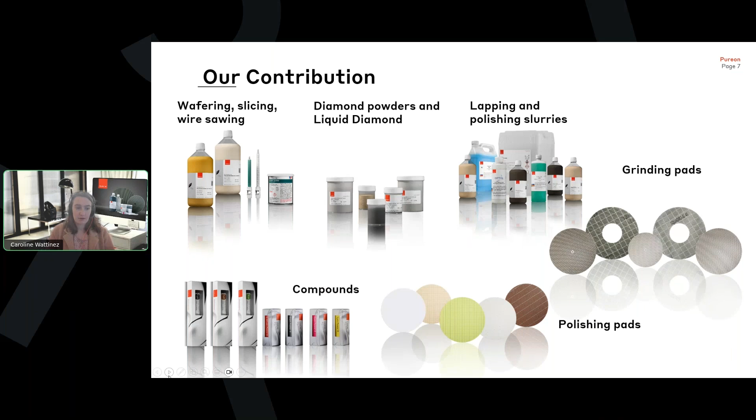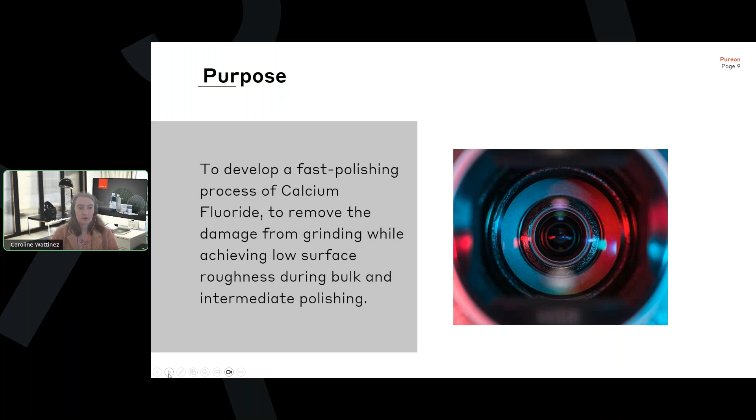Now I'll go into the purpose and background. So the purpose of the study was to develop a fast polishing process of calcium fluoride to remove the damage from grinding while achieving low surface roughness during bulk and intermediate polishing.

Why were we interested in calcium fluoride? We were interested in calcium fluoride because, compared to other optical materials, it has a broad transmission range for ultraviolet and infrared transmission, as well as low absorption, high damage threshold, thermal resistance, and low refraction index.

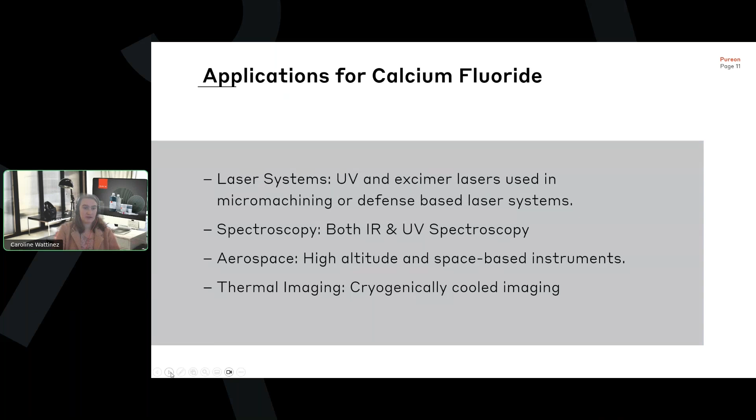Some interesting applications for calcium fluoride include laser systems, UV and excimer lasers used in micromachining or defense-based laser systems, spectroscopy for both IR and UV spectroscopy. In aerospace, it can be used in high altitude and space-based instruments, as well as thermal imaging.

The common manufacturing process for optics we have outlined here. You usually start off with generating your optic, and then you go into grinding in order to get the certain thickness that's needed for the application. And then after grinding, you do lapping or an intermediate polish to remove the damage from grinding. And then after the lapping or intermediate polish, you can go into final polish to remove the damage from the previous steps, as well as to get the surface roughness needed for the application.

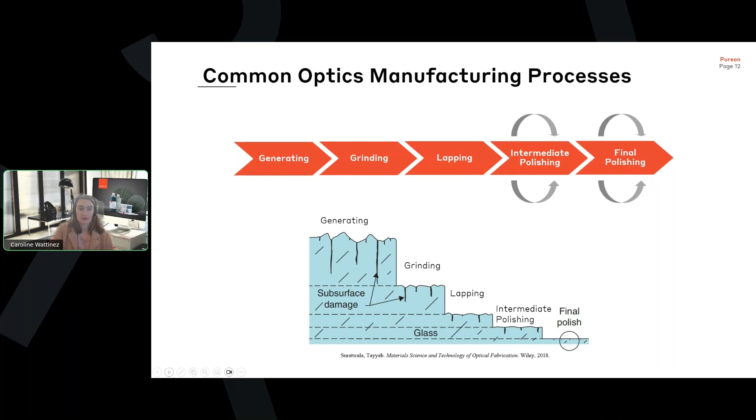But as you go from finer polish to finer polish, each step can get you a more precise surface, but a slower rate. So balancing material removal rate and surface roughness in each of these steps is important to have an optimized process.

So for calcium fluoride's physical properties, we're interested in processing this because it is different than the common optical materials that we're used to polishing. Because of that, the typical polishing solutions that would work for very common materials like fused silica and BK7 do not work for calcium fluoride. Calcium fluoride also has a crystalline structure. So we have some physical properties outlined here.

So as you can see with the Knoop hardness, it is a much less hard or softer material, with 158 Knoop hardness versus fused silica that is 570 and BK7 is 610. Another key difference is the crystalline structure, where calcium fluoride is crystalline versus fused silica and BK7 are not. As well, it has a much higher thermal expansion coefficient.

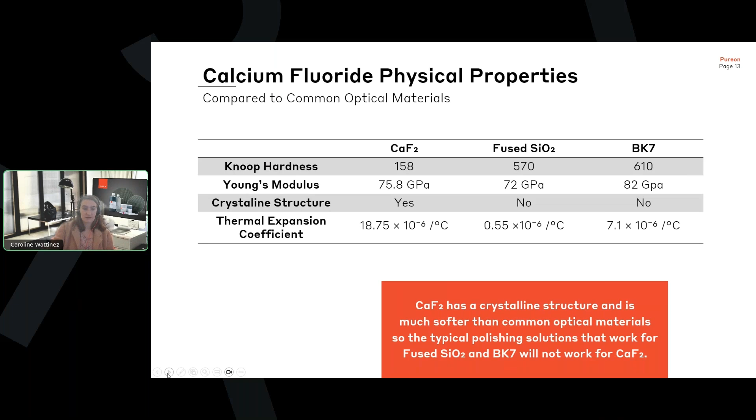The product that we have found that works well with polishing this different type of material is called ULTRA-SOL AlumaGem. The AlumaGem is a platform that utilizes both precisely graded diamonds and alumina abrasives dispersed and suspended in optimized carrier fluid for the bulk and final polishing steps, where you choose a different diamond size depending on the polishing step you're on, using a larger diamond for the first step after grinding for bulk removal, and then stepping down to smaller diamonds.

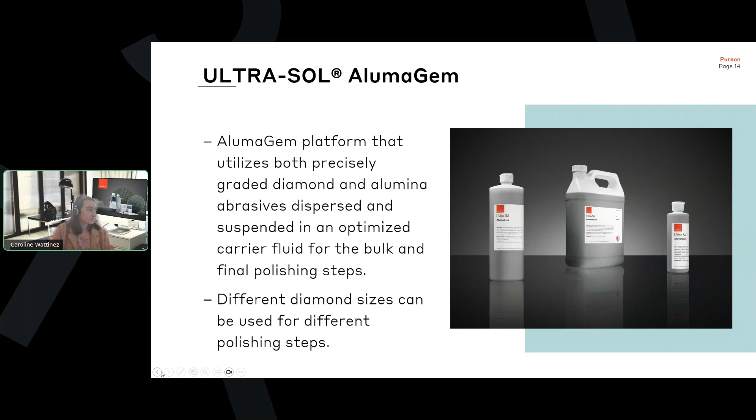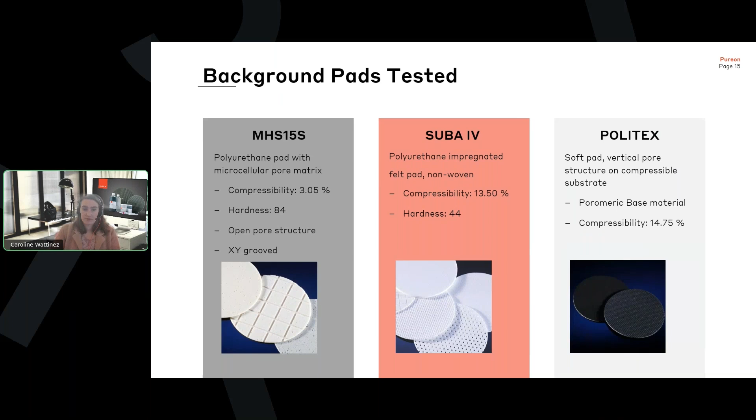We tested 3 different pads in this study: MHS, which is a polyurethane pad with a microcellular pore matrix with a low compressibility of 3% and a high hardness of 84. For this pad, we had it XY grooved. We used Suba IV, which is a polyurethane impregnated felt pad, non-woven, which has a higher compressibility of 13% and a lower hardness of 44. And then the Politex, which is a soft pad, vertical pore structure, and compressible substrate with a compressibility of 14.75%.

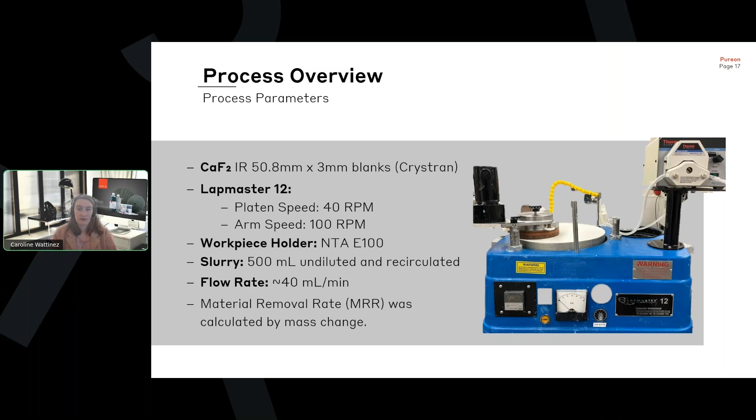The tool we used was the Lapmaster 12, where the platen speed was 40 RPM and the arm speed was 100 RPM. We used our NTA templates to hold the workpiece, and the slurry was varied, but we used 500 milliliters undiluted and recirculated for each step, and the flow rate was 40 mils a minute. The material removal rate was calculated using mass change.

The experimental conditions for the intermediate polish: we tested the MHS pad with a 3-micron AlumaGem, and the tool and the template were the same for both. The puck weights for the sample holder were 5 pounds and 1 pound, which equated to 1.6 psi for the 5-pound puck and 0.3 psi for the 1-pound puck.

For the final polish, we tested MHS, Suba 4, and Politex with a 1/4 micron AlumaGem on the same tool and template. The puck weights were 1 pound, which was 0.3 psi, and 0.3 pounds for 0.1 psi.

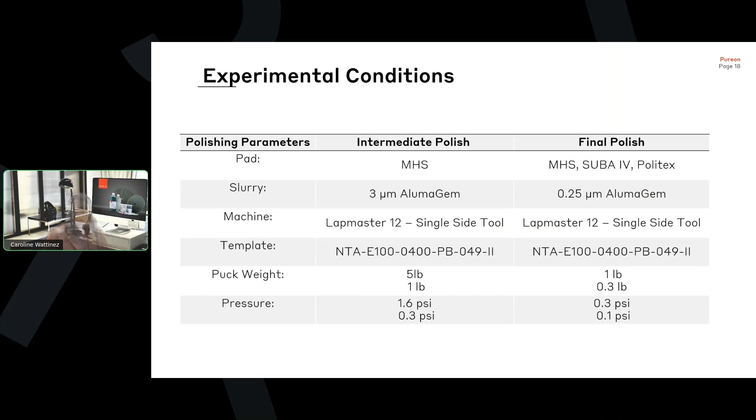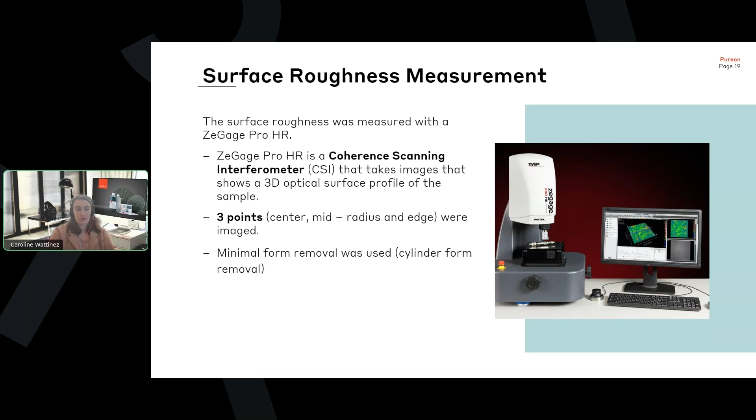We measured the surface roughness with the ZeGage Pro HR, which is a coherence scanning interferometer that takes images that show a 3D optical profile of the sample. We tested 3 different points: center, mid-radius, and edge, and then we averaged these values to get a full picture of the surface. We also used minimal form removal, which was cylinder form removal.

Now I will go on to the results. For the 3-micron AlumaGem step, we used the 2 different pressures of 0.3 psi and 1.6 psi on MHS, and what we found was that the material removal rate was over 3 times faster at 1.6 psi versus 0.3 psi, and there was not a significant difference in surface quality. The material removal rate at 0.3 psi was 10.2 microns an hour, and the material removal rate for 1.6 psi was 30.7 microns an hour.

For surface roughness, the Sa was 6.85 at 0.3 psi and 6.68 for 1.6 psi. And we see the other surface roughness values are slightly better for 1.6 psi: for the root mean squared, or the Sq, it was 8.6 versus 8.51 nanometers. And for the Sz, or the peak to valley, it was 88.2 versus 80 nanometers.

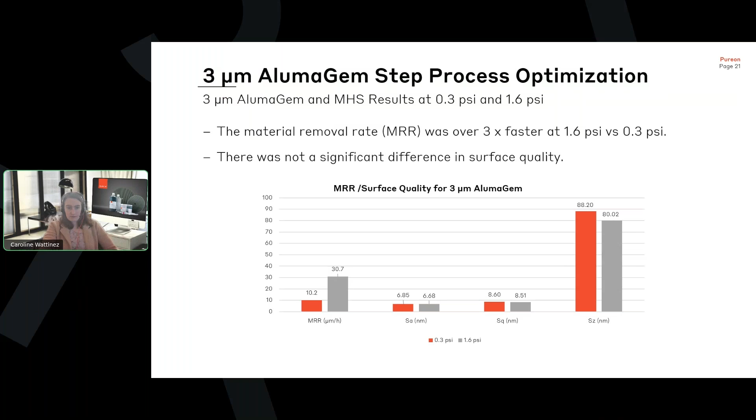And then we have the progression of the 3 micron step. The samples from the ground step had subsurface damage that was quite deep, and here we can see how the surface improves as you remove material. For the ground sample, the Sz, or the peak to valley, started at over 5,000. So there's very deep damage from the ground step, where the Sq, or the root mean squared, was 500 nanometers, and the Sa was 360 nanometers.

After 3 microns were removed, we saw that the surface improved greatly, with the Sa going down to 13 nanometers. But the peak to valley is still quite high at over 1,000. You can see there are these little pits here that are still from the ground damage. At 15 microns removed, the peak to valley reduced by almost half again. And after 20 microns removed, it was completely clear of the ground damage, where the Sa ended up being 5 nanometers, the Sq 6 nanometers, and the Sz down to 56 nanometers from 5,000.

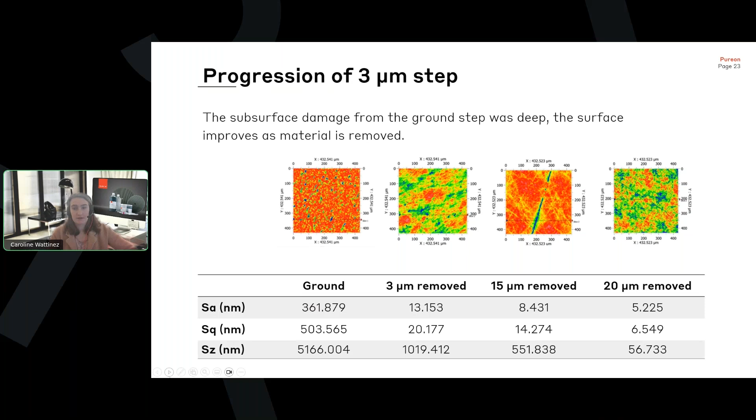So for the quarter micron AlumaGem step with different pads at 0.1 psi, the MHS had a material removal rate of 3.5 microns an hour, and the SA was increased to 11 nanometers, and the SZ increased from like 50 from the previous step to 400 nanometers. So we can see here that there's some damage being introduced by using the MHS on this step,

with these deeper scratches here. For the SUBA 4 step, the material removal rate was 2 microns an hour, and the SA was 58 nanometers, and the SQ was 72 nanometers, and the SZ was 450 nanometers. Again, there is this damage being introduced by using this type of pad here, where we had these circle defects.

And then lastly, we tried the Politex, which had a material removal rate of 3.23 microns an hour. And this one, we saw an improvement in the surface, where the SA went down to 1.56 nanometers, the SQ to 1.9 nanometers, and the SZ to 18 nanometers from 50 from the previous step. So this pad was what we determined would improve the surface and be the one we would go with going forward.

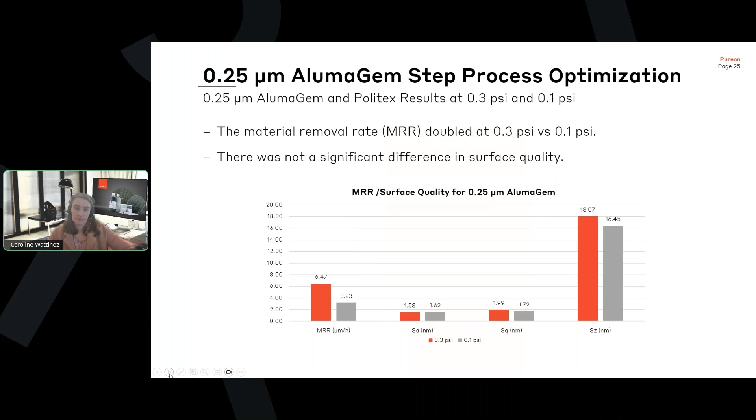So for comparison, we also wanted to see if there was any advantage, if we would get finer surfaces if we tried the alumina suspension without diamond. So it'd be just alumina as the abrasive. So that's what this comparison is here. So on the left, we have 0.25 AlumaGem, and this was at the higher pressure of 0.3 psi, where the material removal rate was 6.47 microns an hour. And then on the right, we have without diamond, and the rate was 3.82 microns an hour. So there's definitely an advantage with the rate when you use the diamond.

And then the surface roughness in general was about the same. So for SA it was 1.33 versus 1.326 nanometers, and then SQ was 1.679 versus 1.629, and then for SZ it was 14.3 nanometers versus 11.2 nanometers for the surface roughness.

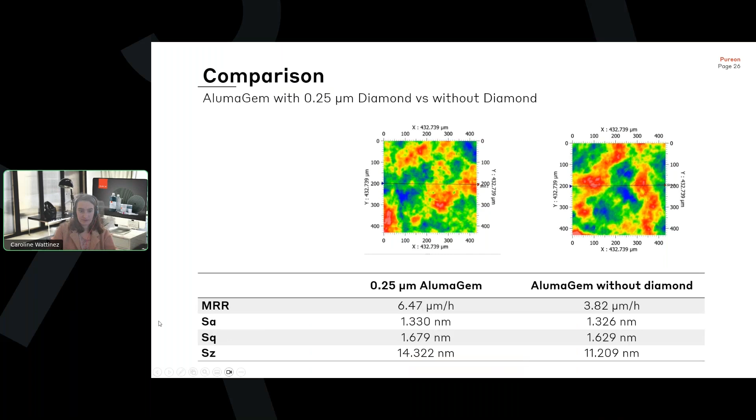So based off these experiments, we found that the final process that was optimized for calcium fluoride was you would start off after grinding, going into a 3 micron AlumaGem on MHS at 1.6 psi, where your material removal rate would be 30.7 microns an hour, and you would need to remove about 20 microns of material, where you would go from a ground surface of around 300 SA to a 5.6 SA surface.

And then after that, to get a finer surface, you would do a 0.25 micron AlumaGem on Politex at 0.3 psi, and your rate would be 6.47 microns an hour, and your SA, you would end up with 1.33 nanometers.

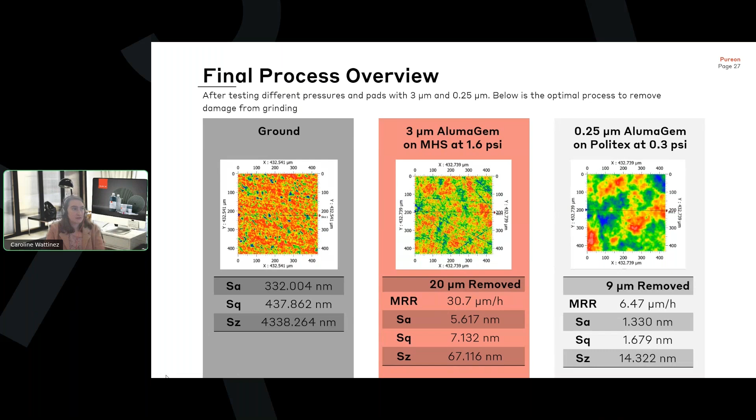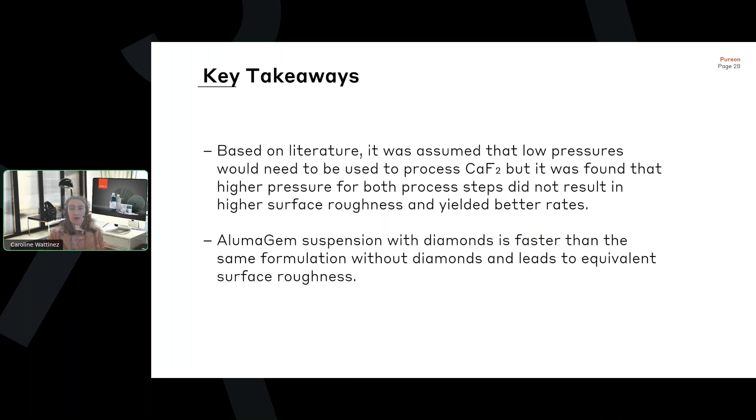So key takeaways we found in this study was that based on the literature, we assumed that the lower pressures would be needed to process calcium fluoride, but we actually found that the higher pressures for both these process steps did not result in higher surface roughness and yielded better rates. And the AlumaGem suspension with diamonds was faster than the same formulation without diamonds, leading to an equivalent surface roughness. So there is a lot of value with having this alumina diamond suspension. And that is my presentation.